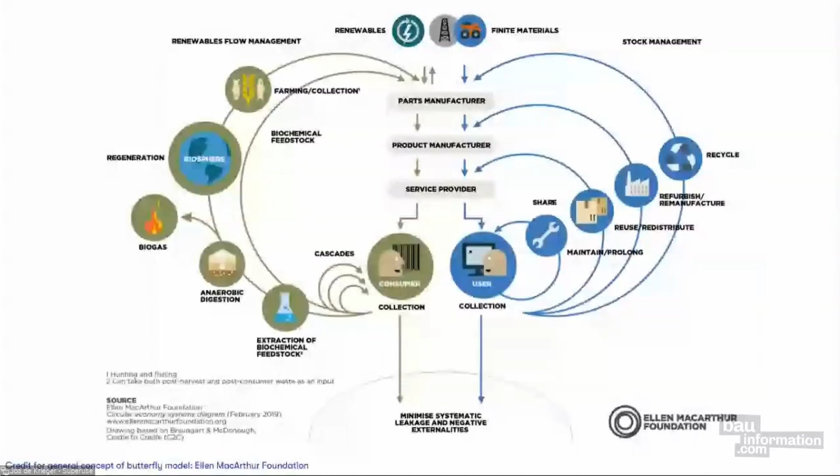More recently, Kate Raworth developed the donut economy model, which I think can be really important for how the architecture profession develops in the future. A good project in a regenerative and distributive economy has a social foundation and an ecological ceiling. Currently, a lot of talks about sustainability in architecture are only about the ecological ceiling—we want to reduce climate emissions, save water, save energy, etc. But the social foundation is just as important. I think that's one of the core things in moving from sustainable architecture towards regenerative architecture: justifying better how we balance the ecological ceiling with the social foundation, the more human-level aspects.

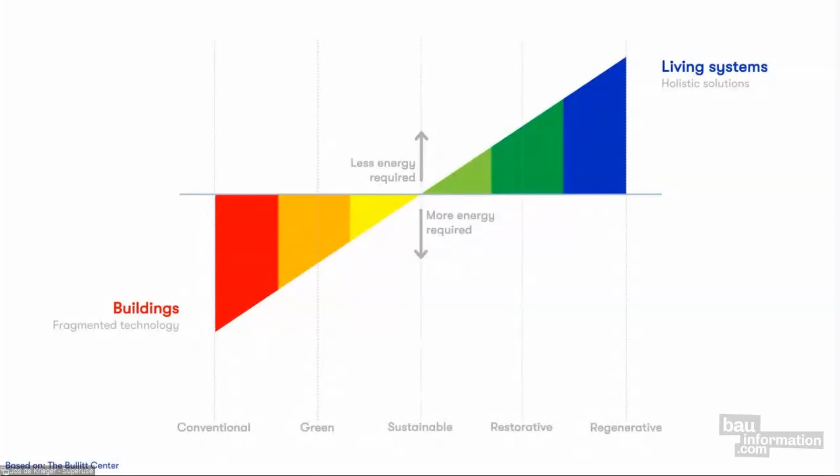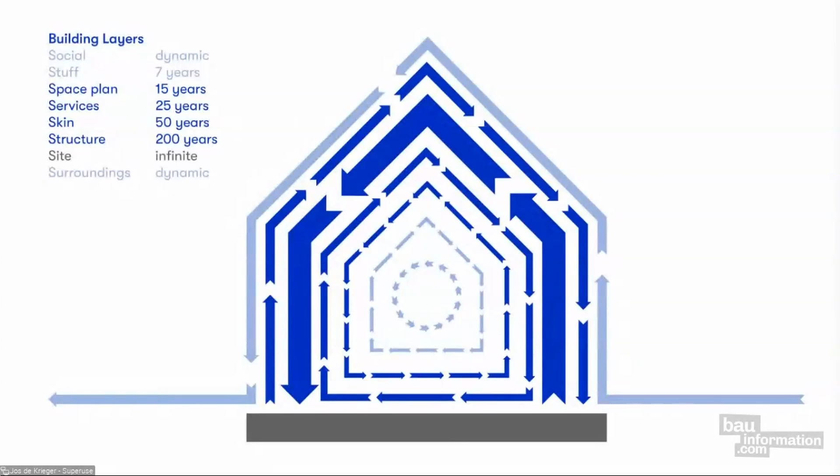In our office we work a lot with Stewart Brand's model of layers, where we look at different elements in a building—for example the skin or facade—that can be taken apart and reused, but also other surfaces should not be endlessly intertwined in a way that they can't disconnect from each other. Another simple tool that we developed ourselves is this decision tree.

To make this choice between working in the technological cycle or the biological cycle, our first option is always looking for ways to prevent material use. Of course, when making architecture, you can't discard every use of materials because you're making spaces. So our first choice is to use reused materials, either directly or transformed, and the transformation should be relatively small to limit the amount of energy you put in.

When we cannot find options to be reused, we'll look for bio-based materials, following the biological cycle of the butterfly model. When these things don't really work, we can look for recycled options, or in the end, conventional options like traditional architecture and the traditional building sector does.

For our projects, that means we change the way we develop a project. Usually you go from a sketch design towards the preliminary design, towards building preparation and construction. But we add a few steps in that standard scheme, where the inventory phase is really important at the beginning of a project, identifying local pains and problems that might be architectural, spatial, but also social, to get a good idea of the context.

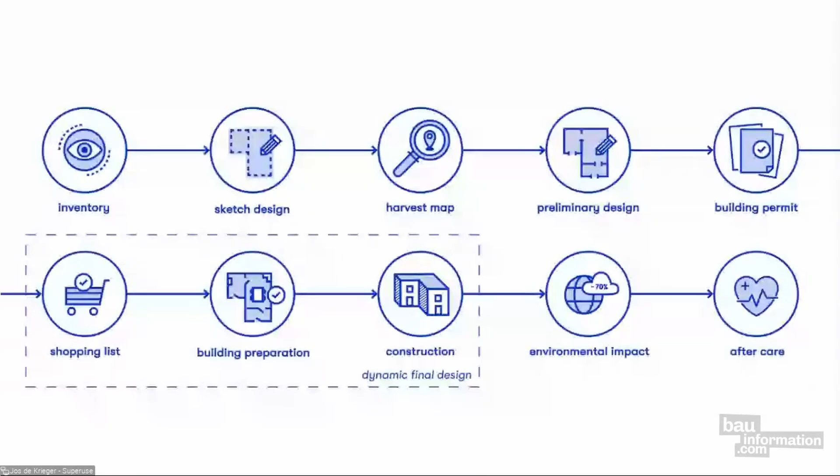Going back to that inventory phase, that means we look at flows, all kinds of flows, and usually for a project you select 2, 3, or 4 to really work on. That will be sufficient, and as any architect, the users are basically always part of that. But sometimes a project is more about traffic, or more about electricity, or more about identity and culture.

One of the main things to take away is that some of these flows are really fast and almost invisible. For example, electricity - when you switch on the light, almost instantly the light turns on, but still that is a movement of electricity from the switch to the lamp. Other flows, like identity and culture, are really slow, processes of 10, 20, or even more years. We're currently in a cultural shift from being meat eaters to plant eaters, which might take another 50 years, but eventually I think we'll see eating meat declining compared to alternatives.

So what that means in projects - one of these stories is Blade-Made. Currently I'm putting a lot of time into Blade-Made, which is basically a startup. We've made some projects in the past looking at wind turbines, and we're trying to make that into a separate business to really tackle the problem of blade waste.

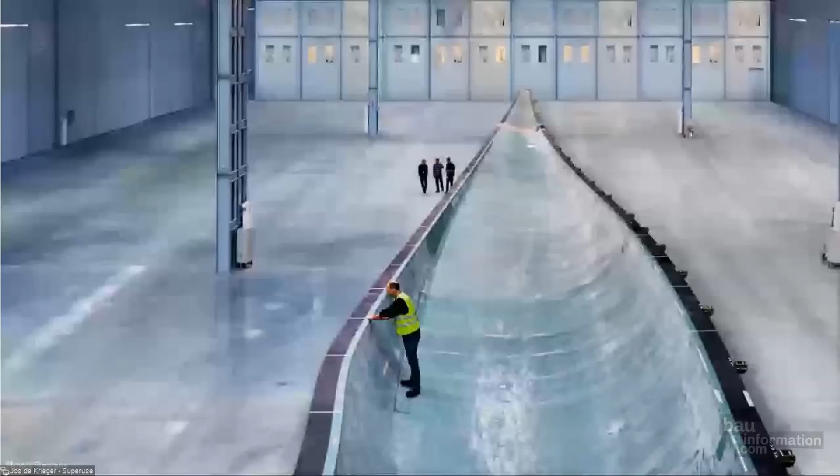Probably you all know wind turbines as an icon of the sustainable energy movement, but you rarely see the backside of it, and part of it is how they are made. It's a combination of highly technological labor to calculate how to harvest energy from the wind, and these blades, well, they're getting bigger and bigger, up to 90 or even 100 meters.

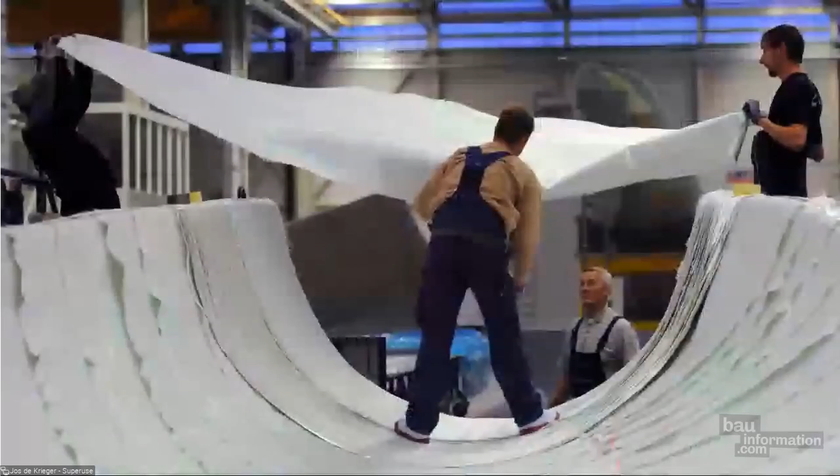But that also means we're replacing blades. They're maintaining and building the blades by hand, so it's technological labor - university graduates working on new technologies - but also people working by hand, putting glass fiber sheets in shape and physically making the product. But then in the end, we discard the blades.

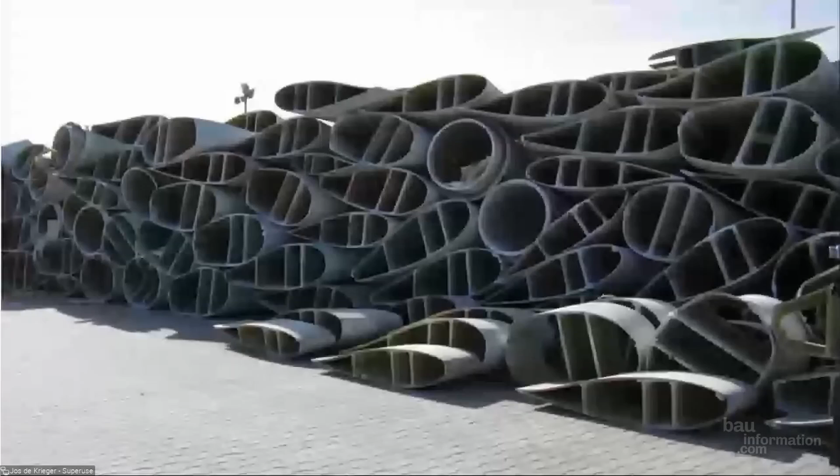In Europe, we actually chop them into pieces and incinerate them, trying to recover some energy. But still there's a lot of scrap and ash afterward that has to be landfilled anyway, or at least stored somewhere, because currently we have no good recycling alternatives. We're working on that as a society - not just us as an office.

To make blades recyclable, they're trying to add glass fiber to it, sort of recycling the waste in concrete products. But I think that's just polluting the concrete for future reuse. So we are looking for options to reuse the blades as they are in projects.

One example is a playground in Rotterdam that we designed 12 or 13 years ago. This was the first blade-made project that we did, and once we were doing it, we knew it wouldn't be the last.

Because when it was finished, it's such a wonderful place that sparks the imagination of children. So they're not forced to be pirates on a ship anymore or knights in a castle. They can be anything they want in here.

One day they can play that this is a rabbit's hole, and another day they can play that it's a spaceship. For this playground, we used 5 blades of about 25 meters long.

We researched around that time and thought that the flow of blades in the Netherlands would be roughly 200 per year, 10 years ago. Currently that flow is getting larger and larger.

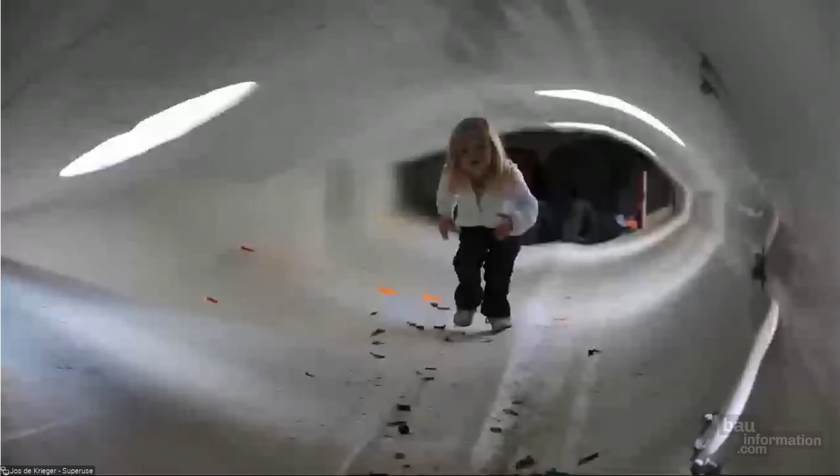But what's even more amazing, when you go to the other side of this blade and go inside, you see a space that we really wouldn't have been able to design if it weren't for the given shape of the blade, designed by engineers to harvest energy from the moving wind.

At the base of the blade, it's 1.4 meters high, so kids can just run in and crawl through. As you can see, if you're an adult, you have to get on your knees in the back.

All the openings are made specifically where they need to be according to health and safety rules. Because the blade slowly becomes smaller, you need more openings and more places where you can exit.

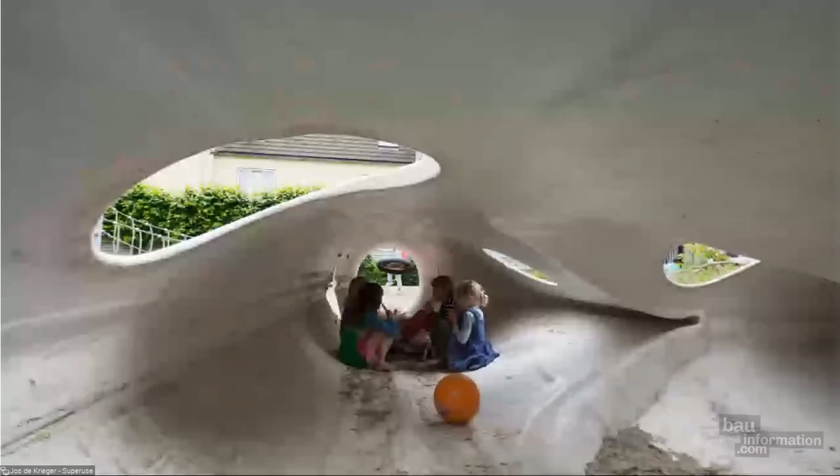With the current flow of blades in the Netherlands, we could probably make 100 playgrounds a year, but we don't really see a demand for 100 playgrounds a year currently.

So what could we do besides that? Because this playground reduces roughly 90% of carbon emissions compared to a standard playground made of stainless steel.

Or sustainable wood towers - the same size, roughly the same amount of play opportunities, can be a lot more polluting than what our recycled or reused solution is.

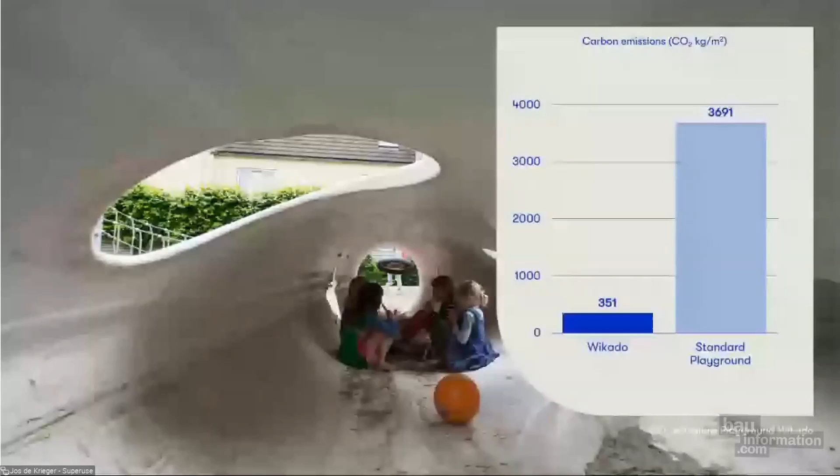After this playground, we did get a few other projects with blades, and one of them is also in Rotterdam. It's urban furniture, made roughly 10 years ago.

These 9 blades are only 6 meters long, so they're relatively small. And the request was for an object that can be moved around.

So it's in a fixed place, but when there's an event on the square, they can disconnect, lift the blocks with the blades, and put them somewhere in a corner so they can have the full square for a concert.

Or whatever. It should also be nice when it's in full use with lots of people on it, but it should also be nice as a sculptural object in space when it's just a few people walking by.

Recently, in the past year, it got a new paint job, and with that a new meaning. So an extra layer of meaning has been added to it.

Graffiti artist Mr. June spray painted rainbow ribbons around it to make an LGBTQ+ monument. So it's a place where those people can come together - they can either commemorate, remember, protest, or just have a happy get-together and some drinks.

And it's really nice that the blades have such a strong identity and such a strong shape on their own that you can easily add another layer of meaning like this to the object as it was.

More recently, we made another playground on the beach in Terneuzen, a city along the Dutch coast. It's roughly the same idea, in a unique configuration, because all blade-made installations are one-offs right now. That's something we want to change, because some of these things you can make more repetitive. For example, a tower like this with climbing grips, you can make 10 of those and place them in a playground as a single object. So throwing those blades away is a real waste of potential.

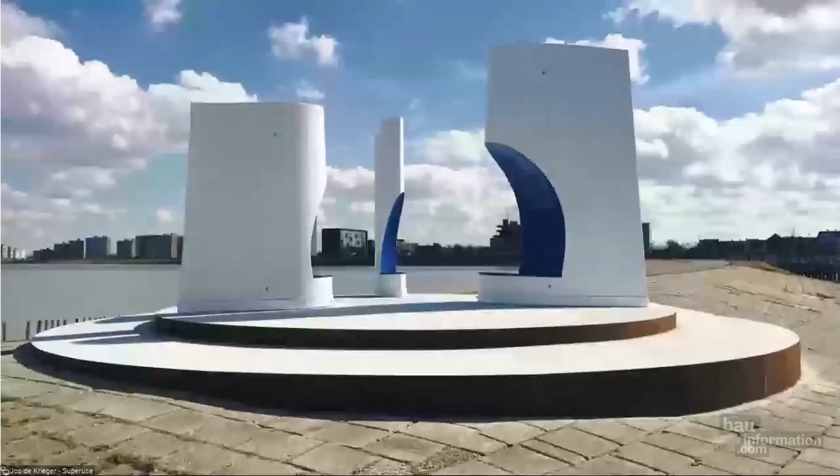Finally, on blade-made, close by to the playground, there's this piece at the end of the pier, where 3 small sections have been put in a sculptural configuration. It's an art object. It marks the end of the pier, but it's also a place where you can sit down, or when you stand inside, you can see how big they actually are.

Just a smaller thing, or bigger thing if you want, on a recycling center we designed in Maastricht, close to Germany and Belgium. There's this recycling center, and one blade is put up as a billboard. It was meant to play a part in the ventilation system of the building itself, but that proved quite hard to calculate for the mechanical engineers. So in the end it's just a billboard, but still it's a pretty good place to store these objects until recycling methods are actually cheap and sustainable.

So one of the things you might wonder is, how do you get these materials? How do you find the blades, or anything else in our projects? With this recycling center, the window frames come from demolition projects nearby, the steel sheets come as leftovers from factories nearby, etc.

For that, we developed a platform called Harvest Map, which we last year sold to New Horizon, an urban mining company. The goal is to have a really big inventory of materials available for reuse at your disposal when you start designing, so you have an idea of what's available. That can be materials from the building sector, like window frames, doors, system ceilings, whatever. But it can also be stuff from other sources like industrial waste, production waste, or anything you can imagine, basically, even waste from exhibitions. We try to get all that information together on a map so we have an idea what we can find when we have a project, for example here in Rotterdam, what's in the neighborhood. And if we have a project in Amsterdam, what's around there, so we try to harvest as locally as possible.

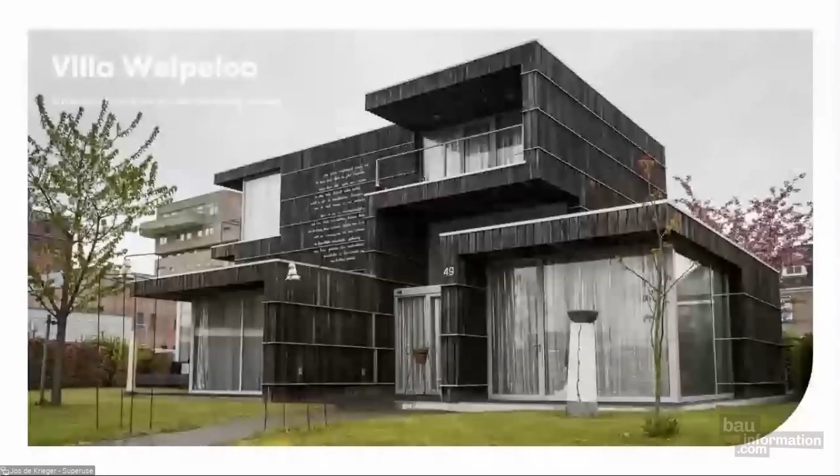One of the first bigger scale projects we did with this strategy of superuse or reuse is Villa Welpeloo, a modern house for an art collecting couple. They specifically came to us because they wanted their house made out of waste, out of reuse. The idea for us is not that you have to be able to see that waste materials are used. We want to make good functional architecture that just fits in the neighborhood, fits the surroundings, fits what the client likes and wants, etc. So the outside doesn't reveal in any way that 60% of the materials in this building are actually saved from landfill or incineration.

Even on the inside, not everything you see is waste, but also in places where you don't see any material, for example the insulation inside, there will be waste materials used. On this harvest map, specifically for this project, you can see that we reused a building elevator. It was used to make the steel structure of the house, and then integrated into the house to connect the first floor, the kitchen, with the floor where the bedrooms are.

A lot of material, all the facade cladding, is cable reels, so we harvested the core of the cable reels. We reused a textile machine found at a local scrap iron reseller nearby. We used stainless steel offcuts, like the ones you see in the bottom right, building advertisement boards, and the curtains are made from the mesh fabric that hangs in greenhouses.

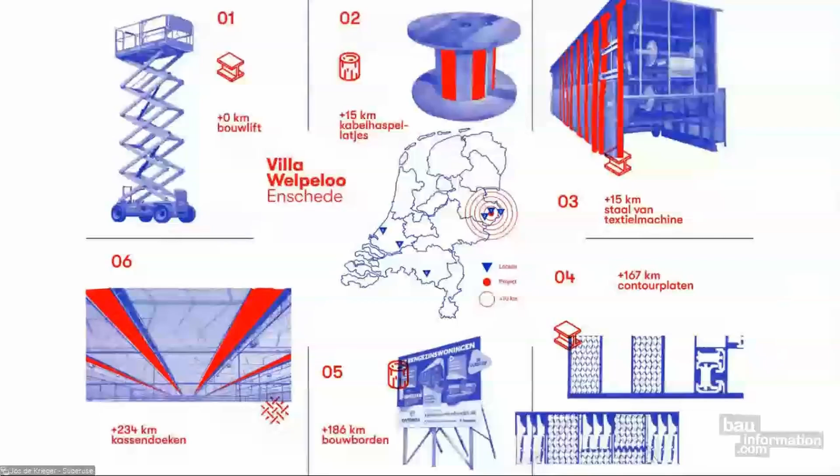So in detail, all these materials come together. For example, the insulation on the inside is the cut-out pieces of caravan production. When they make the walls of a caravan, they cut out the windows, and that insulation material would be thrown away. We collected that to make the walls, the facades of the villa.

On the facade itself, we did this environmental calculation to understand what we're actually doing. Are we just designing a nice facade? Compared to a new wooden facade of the same type, we're reducing over 90% on carbon emissions. So these are big steps compared to just making a new bio-based facade.

Same goes for the steel structure. As I mentioned, it came from a textile machine. On the left is the machine that it was in the past, or something similar. On the right is what we found at a scrap iron seller nearby. Of course, the steel was cleaned, coated, treated, and cut to the right sizes, and roughly 90-95% of the steel in the house is made from the textile machine.

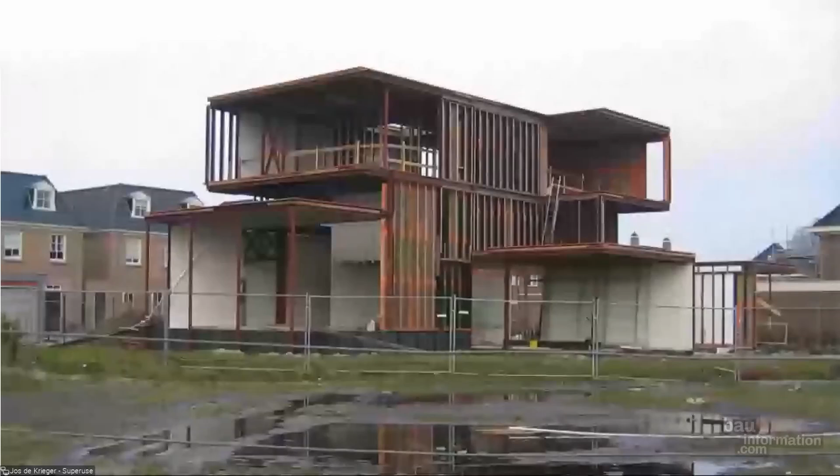We had to add some pieces to either make it fit, or to make the crosses, or small things. Again, for the steel structure, almost 90% reduction on carbon emissions — not completely 90%, but still big steps compared to a new steel structure.

So it's really worth it to reuse the products that we have and not throw them away, because recycling also takes a lot of energy, since you'd have to break the steel into pieces. There's a machine that does that. You have to melt it. There's fire, there's coal, there's all this energy that you're investing again to recycle material into something new.

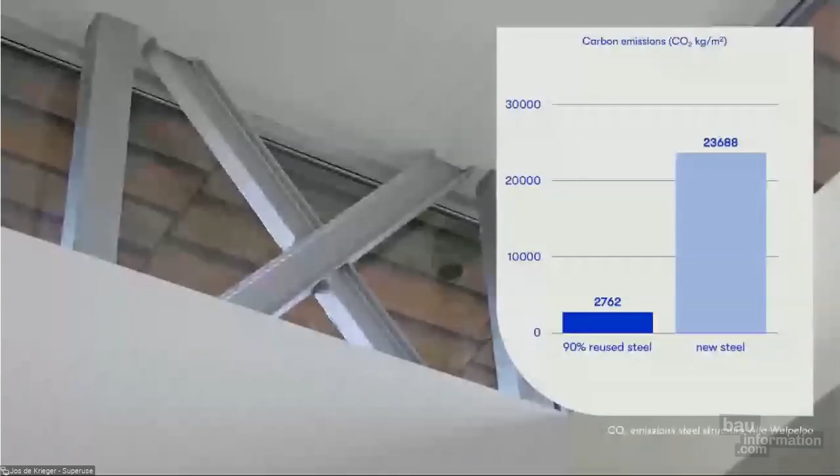So that's Villa Welpelo, one of the bigger scale houses that we've done. Currently we're working on two housing projects as well — one in Den Bosch with 20 houses, and one in Rotterdam with roughly close to 50 houses on a renovation project. But on another scale, or maybe more approachable, is this one, KEVN.

It's a project that has an exhibition space. It has food and drinks, like a bar, but it also has workplaces in a school building right behind it. So we added a semi-public facility for the creatives in the school who have their workplace there.

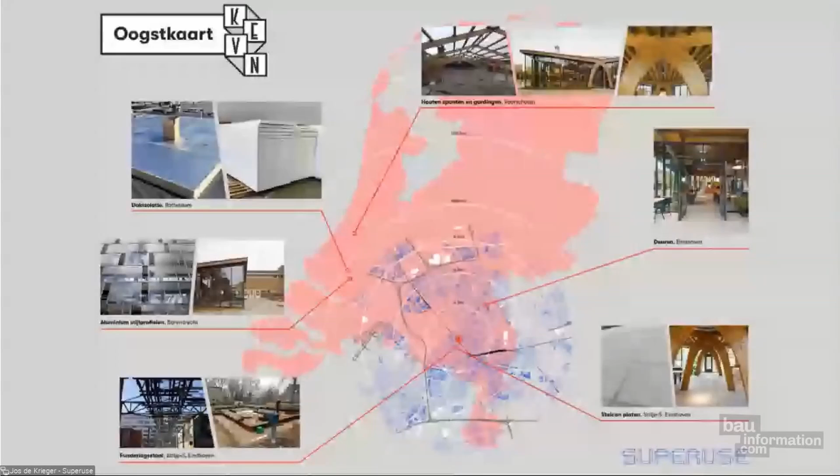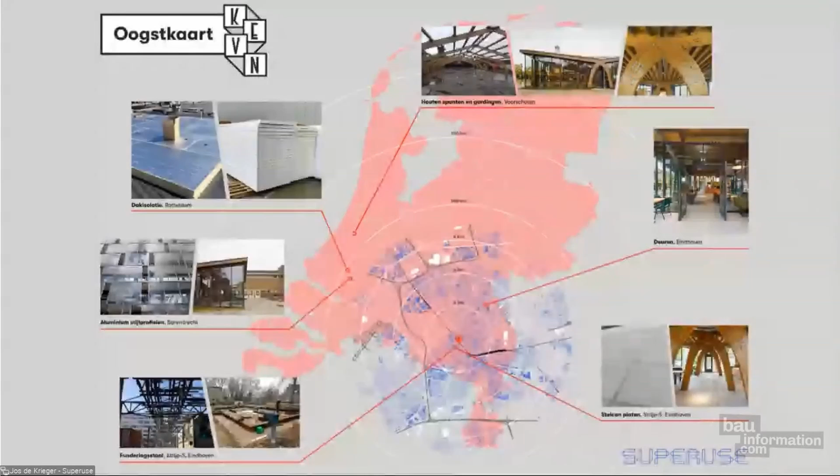And the neighbors around. On that harvest map, you can see that we were sourcing locally, just a few hundred meters from the site in the city of Eindhoven, also a little further away in Barendrecht, Rotterdam, or elsewhere in the Netherlands. So we're not that strict that everything has to come from the city where you're designing, but you try to get preferably heavy things as close as possible, and other things sometimes might be a bit further away.

And the way we work is such that — I'll just go back two slides — you see the wooden trusses that are pretty iconic to the extension. They weren't found like that, so we had to figure out a way to transform them to make the right height, size, and space for this pavilion. The way it's done is to cut them into pieces and reconnect them with some steel bolts, and make them into the shape that fits the site.

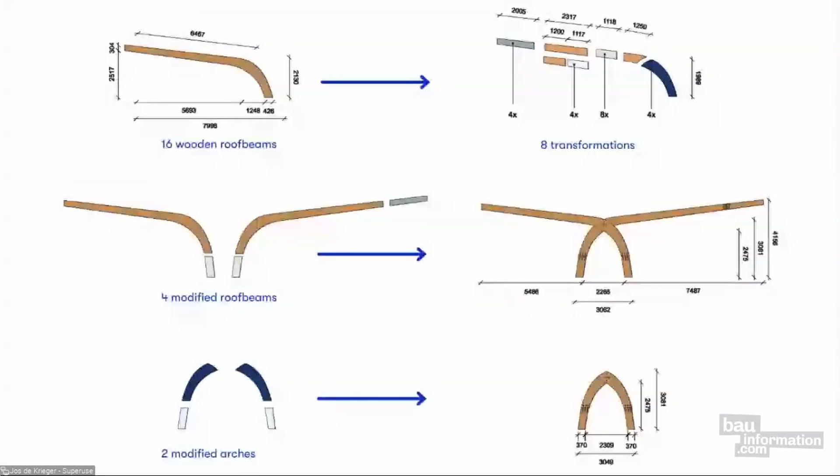The whole building is made in such a way that it's basically only dry connections. We have concrete slabs from an industrial site nearby that are stacked in layers to create a foundation. Within that foundation, the floor heating is integrated. The wooden trusses are put on top, and the facade is connected all around.

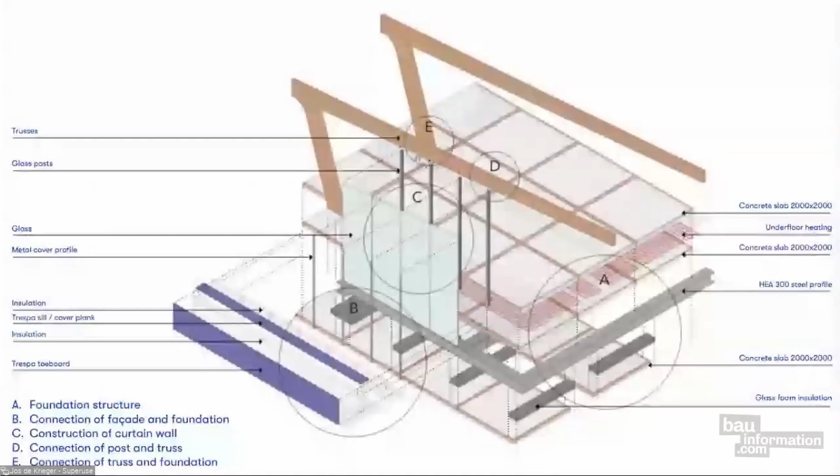So going back to the theme of the talk, creating urban ecosystems — a bit older project, but this explains it well — for a shrinking city in the south of the Netherlands, where it used to be a mining area, but that identity was sort of lost when the mines closed. They added the Central Bureau of Statistics to that city, but that never really was a right match. So we came up with a strategy to inspire other urban planners how to deal with a neighborhood like that, and said maybe food is the new identity of that neighborhood.

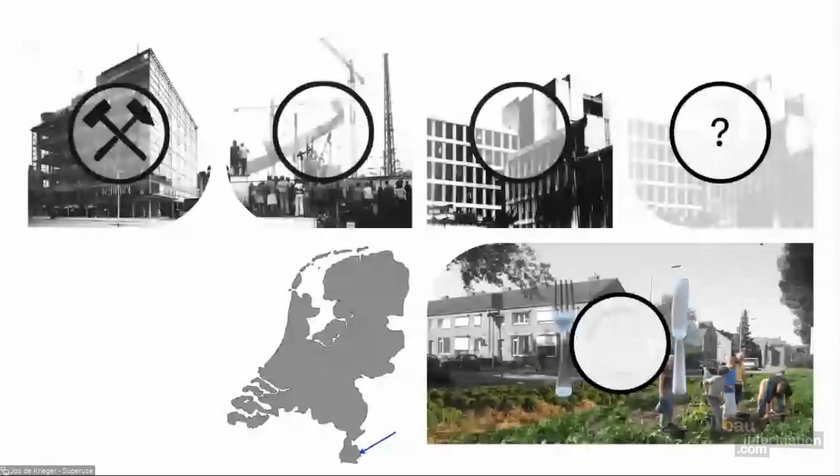And for all these types, we came up with ideas, solutions to move towards a more food-related neighborhood with more open space and space to store rainwater. And with that came some scenario planning.

We say that it's pretty hard to make more room for cattle, but we can increase the amount of agricultural land. With the increase, we have more production, so we keep our outflow of food the same, our export, but we start to produce more for what we use internally inside the neighborhood. And that helps to create a stronger local economy.

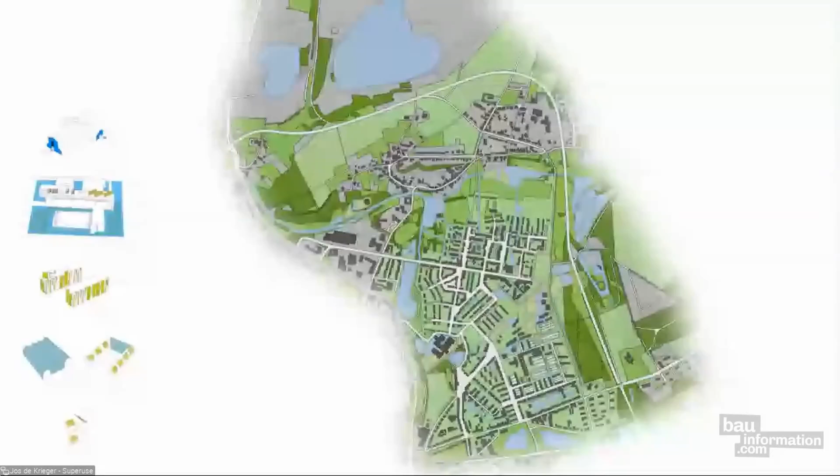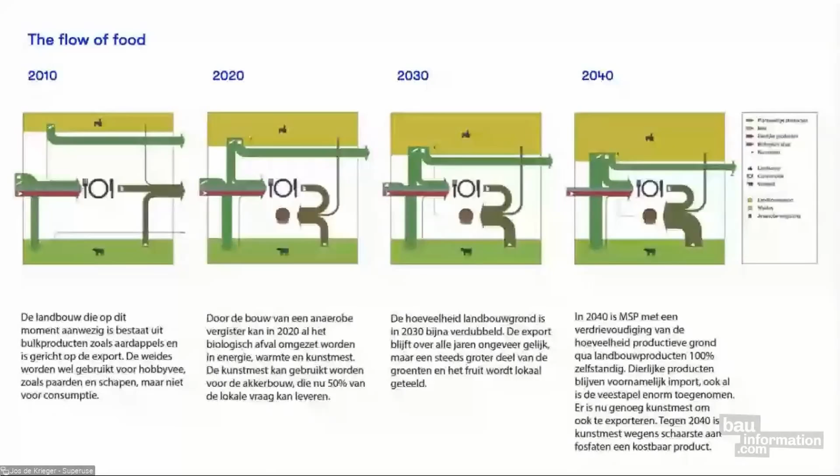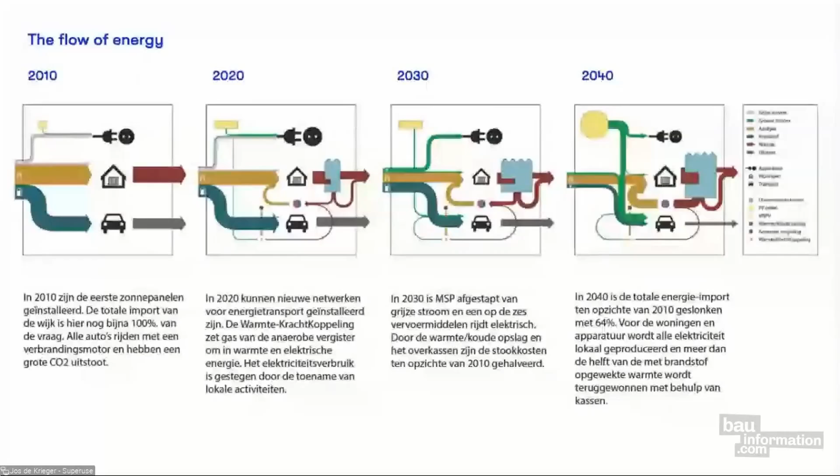So how that all comes together is this vision of, in 2010, there are certain flows, local flows, regional flows, national flows, and international flows, where food comes from, the energy comes from, etc.

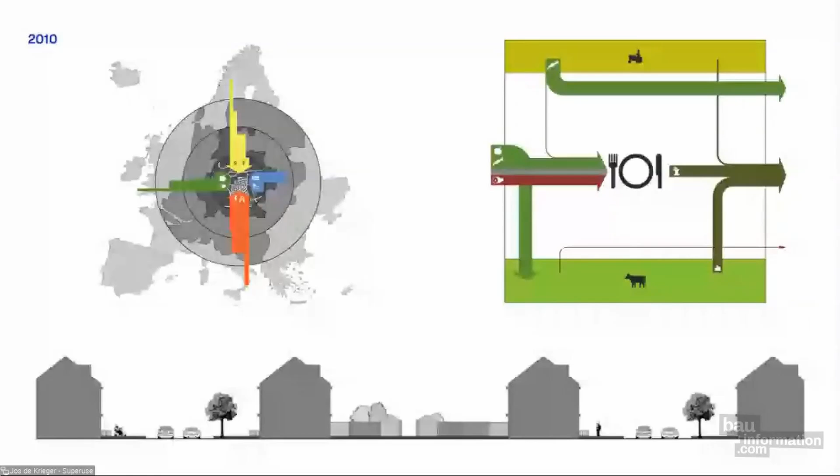And well, the relatively boring street, back alley street structure of that neighborhood, where we envision that it can be transformed to one street becoming more a park-like landscape, because more local economy means less cars, less people means less cars, so we can reduce the amount of streets.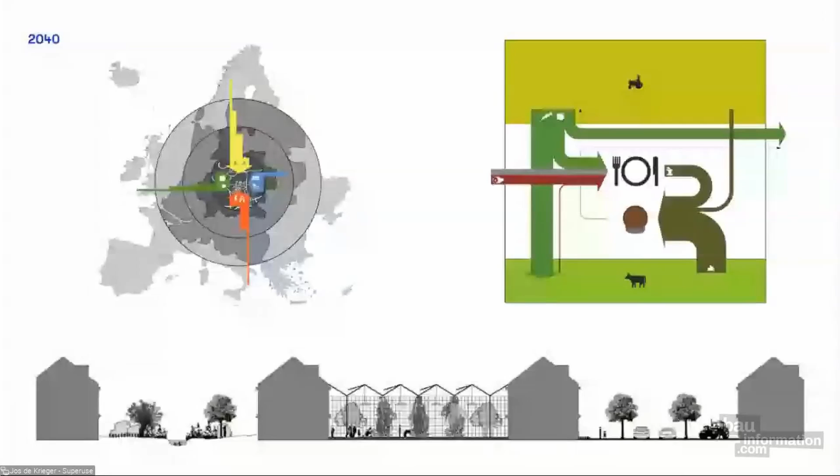Some of the courtyards or the back gardens can be converted into shared spaces, greenhouses, where you extend the living area of your house into that shared space.

And for example, that looks like this, that in the neighborhood itself, you build a complete structure around it of reused window frames to basically give the old houses an extra jacket. Or this is a bit of a tough image to load.

Or, well, creating these water landscapes in between the houses. And as you can see, the darker blue elements in that scheme were the elements that were already there. And all the light blue elements are objects that we added to that system to create that local ecosystem.

And well, the elements that we add, we call them cyclifiers, so elements that help you to close loops, to close cycles in a neighborhood.

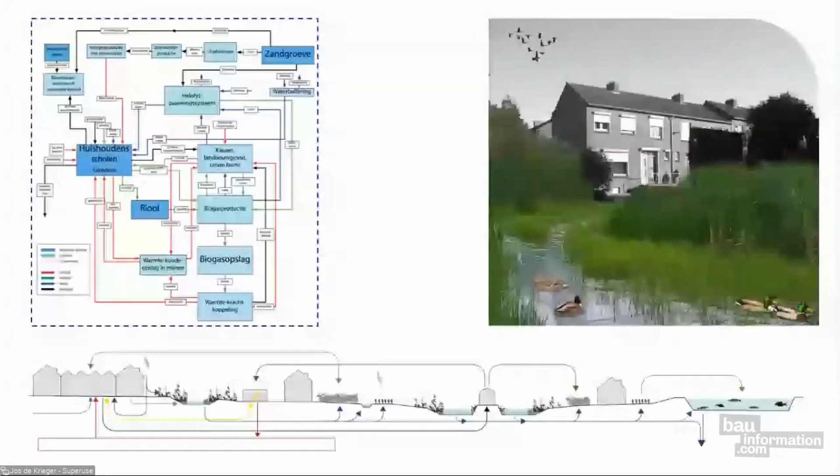So of course, the images are, I think, over 10 years old, so currently we will make them a little bit nicer, but still it represents the idea of what the neighborhood could be quite well. So bringing nature back to the city, transforming the leftover parts of green to a place where you can see cows again or see goats again.

That was all a study, something hypothetical, but we're actually doing that right now in Blue City in Rotterdam, where we have our office as well. So I'm currently in this building, and this used to be a subtropical swimming paradise, a place where people from Rotterdam and the surroundings would go to enjoy wild water tracks, slides, sauna, all these things.

We had actually been inside when the swimming pool was bankrupt to harvest materials for another project. All the plants had died, but we managed to save some of them, and they moved with us with our office a couple of times, and now they are back in this building again.

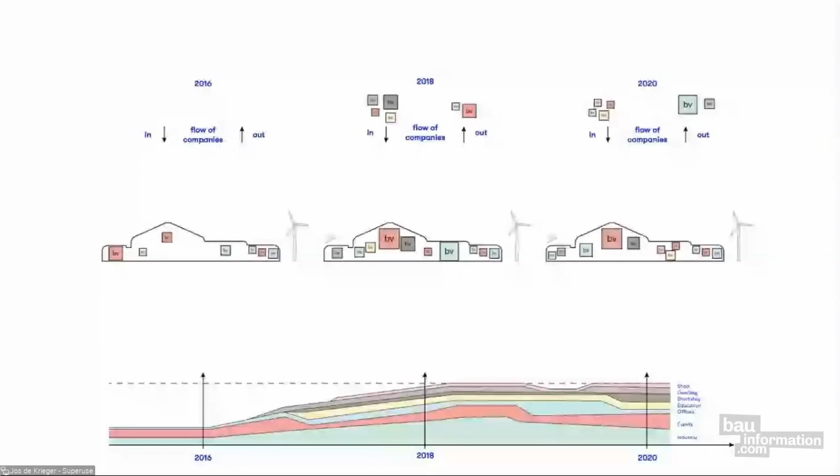The vision in general was, we are not going to make one design and execute it completely and then have a grand opening. It's a vision we can slowly develop over a couple of years, looking two years ahead all the time at the companies that move in and out, slowly filling and redeveloping the building, looking at the flows that they have.

So do they have paper waste? Do they have waste heat? Do they use a lot of electricity? And while mapping these flows, we try to find other connections and other buildings or companies that could come together in this building and benefit from each other.

So for example, currently we have a brewer, and of course they have waste heat. We have some catering, a restaurant, and all the coffee waste is collected by RotterZwam, and they will use it to grow mushrooms, etc.

And of course the space itself is transformed with waste materials like window frames, but also the chairs, the tables, the carpet, the electrical gutters, the lamps are all coming from various local sources.

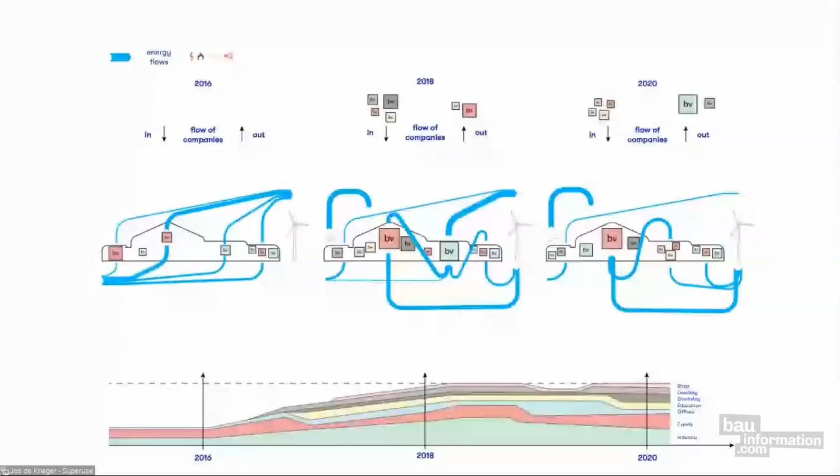Here you can see it all coming together in a harvest map for Blue City. A lot of materials have different locations where they are found, different distances from the site they are collected, visualized here in a section where they end up, and shown how much carbon reduction is saved by reusing that instead of buying new materials for it.

And on total, for this office renovation project, we reduced roughly 68% of carbon emissions compared to a regular construction.

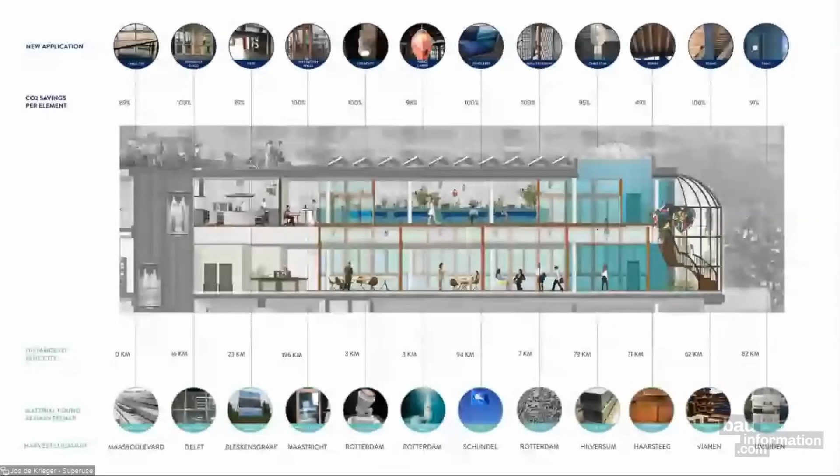In the past year, we opened Blue City Lab in the basement, which is a really nice new addition, where we have a wet lab and a dry lab where new circular or biomaterials are developed by a group called Pioneers. They're working with fungi and seaweeds, trying to develop the materials for the future. In the dry lab, they have the tools to see what they can do with these materials, like CNC milling, woodworking, bending, whatever.

Also for Blue City Lab, we did the calculation that we roughly reduced 112 tons of carbon compared to traditional ways of making such a space, which is the equivalent of driving back and forth between Rotterdam and Paris 652 times.

So all these things matter. Every small design choice you make matters.

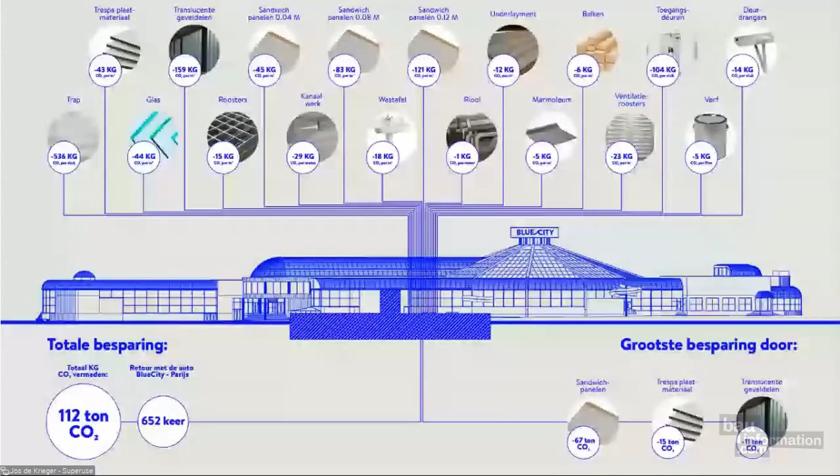And finally, of course, we envision together with Superuse China even larger projects. This is a vision for a wastewater treatment site. Currently, you see that the terrain is almost empty. There are two round tanks in the middle and some structures around it that together form a wastewater treatment plant. When we drew the system boundary of that whole site, we saw there's quite a lot of potential to add new functions.

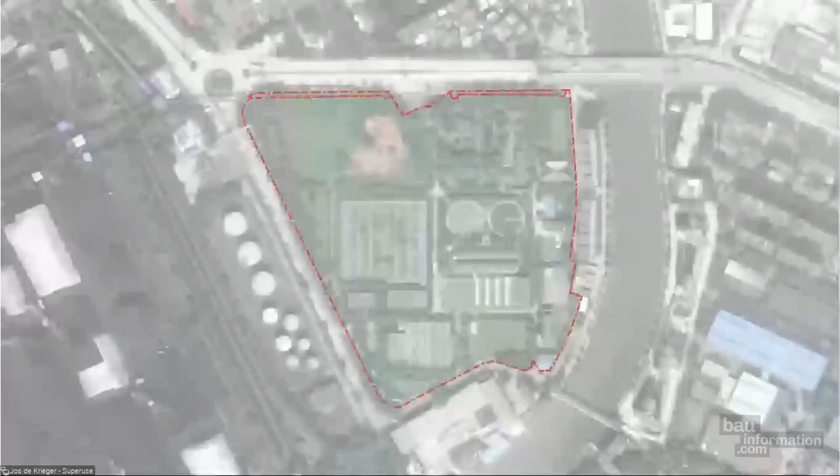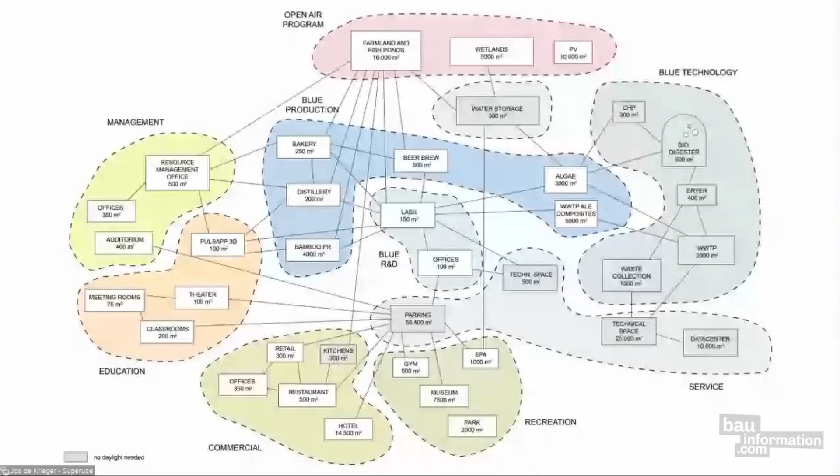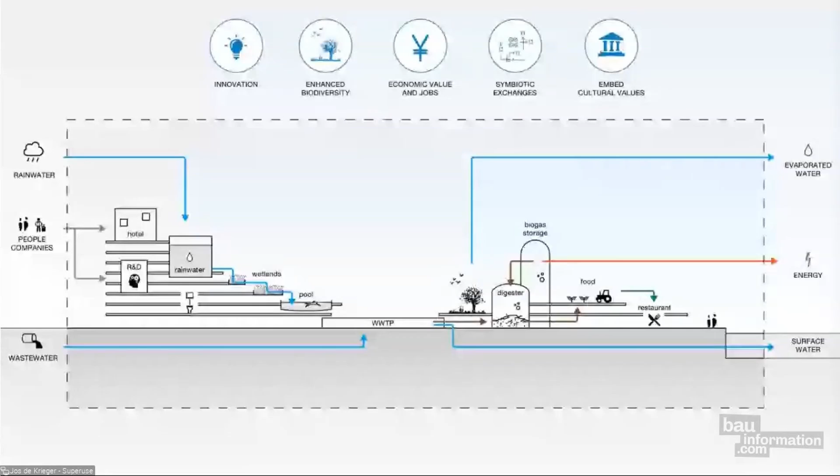We've drawn up a rough section of that where the wastewater treatment plant will stay functioning while the new building around it is developed, and also afterwards. So there's two round circles in the middle, they are still there. Some of the bigger tanks of the wastewater treatment plant are still there, but around that, a sort of big resource valley can develop to create a showcase project for what the blue economy could bring for China.

So that is what I wanted to share with you today. Thanks for your attention.